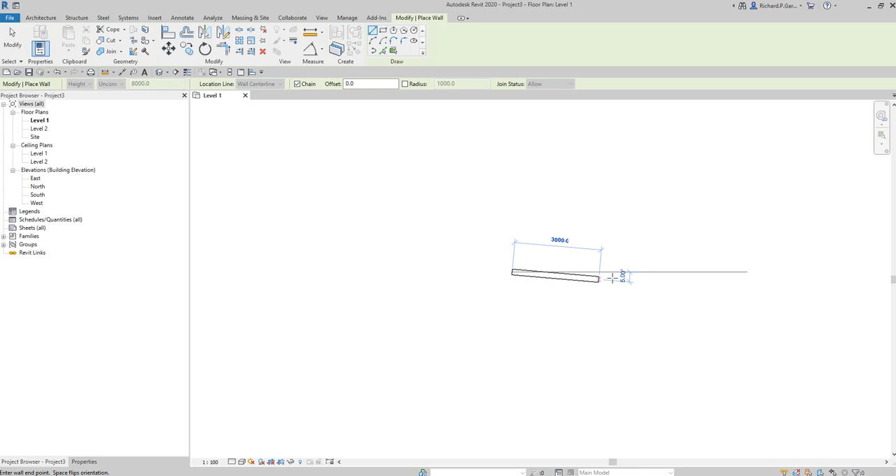So for you to be able to follow, I'm just going to create a new project using an architectural template, and then select OK. I'll just create a wall here, pick two points, and then place a window.

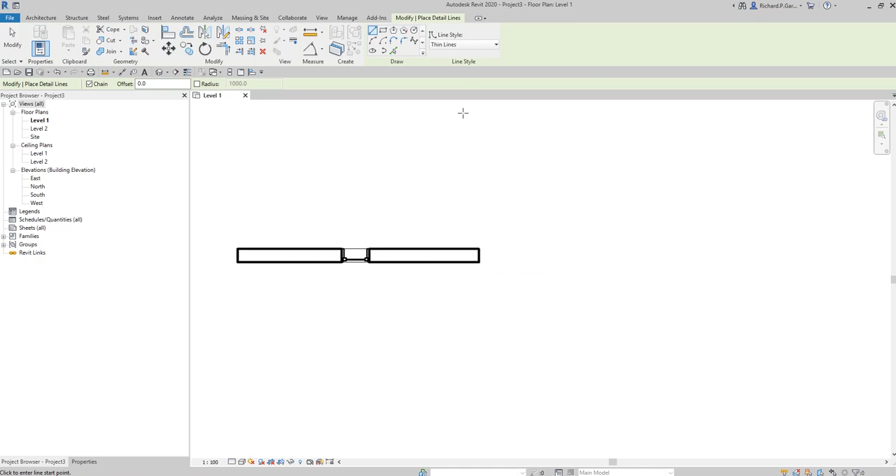So there's my window. Since I want to learn also how to generate a point from an intersecting element, I'm going to create a line here. Let's say, for example, I'm going to create two arcs.

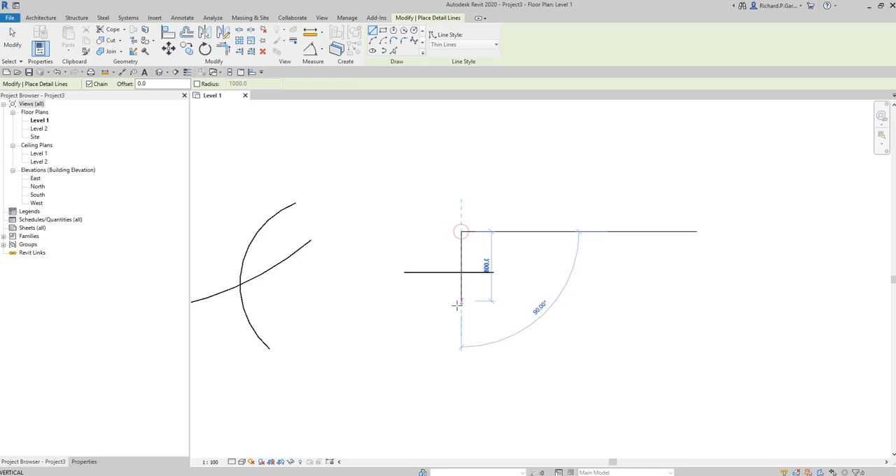I want to locate that point, get the location of that point in Dynamo. I'm also going to create another two lines here, just like that one, so I also want to get that point using Dynamo.

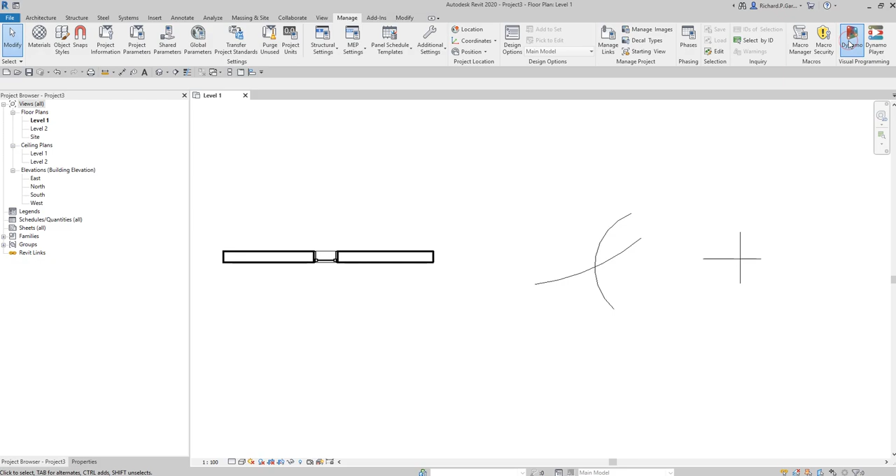After creating this sample model for our exercise, let's dive into Dynamo. Let's go to Manage, then Visual Programming, and click Dynamo. There you go, and then let's create a new workspace here, so I select new.

I'm not going to maximize the window because I want to see my Revit model here. So what I want to do first is generate the points here in Dynamo. I want to get the insertion point of this family. Okay, so that is what I want to get.

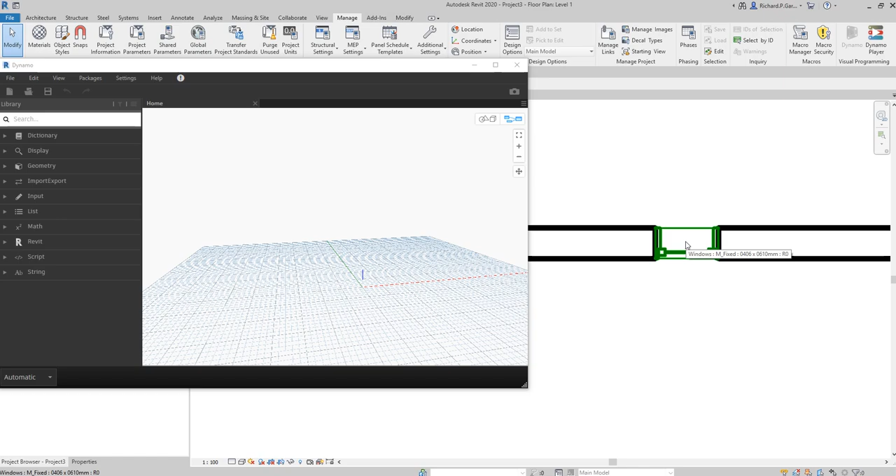To do that, I'm going to use this node that you already know. We are going to select Model. So we have two types of nodes here: Select Model Element, and the other one, Elements, if you want to select multiple elements. The other one is if you only want to select a single model element. So I'm going to go ahead and select this one.

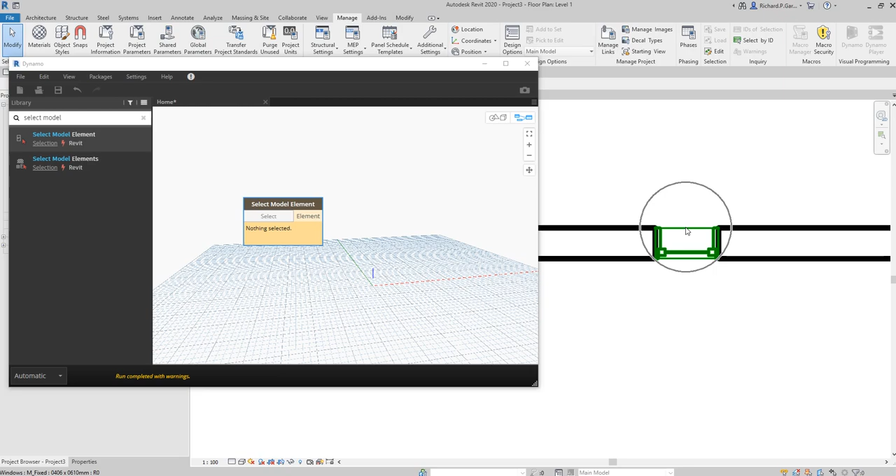As you can see, it says nothing selected. So I'm going to click Select, then hover my pointer to Revit to select the window. Once I click that, Revit will read that as element 361857. So this is the type of window that I just selected.

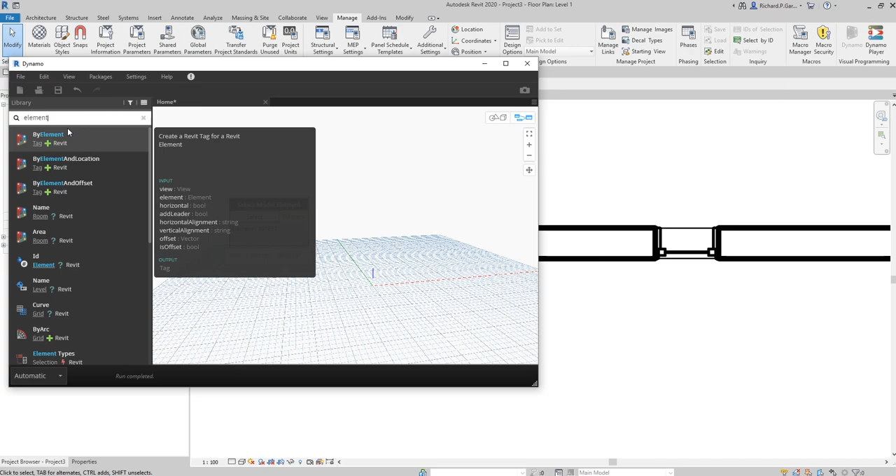Now, for me to get the location of that particular element, I'm going to search for get location. Element Get Location — there you go. This is the node that you will be using if you want to get the location of a particular family, just like this one.

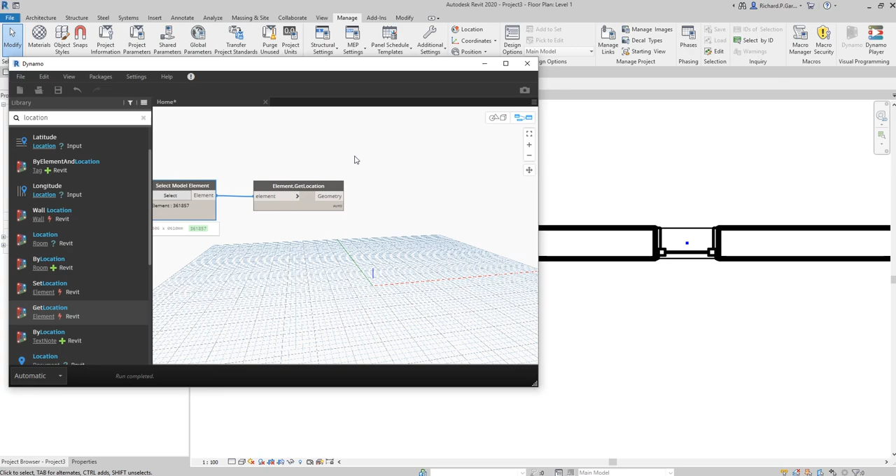After I select that family, I'm now going to connect that wire to Element, and place it. After it runs completed, there's now the point. So what is the location of that point? If I put here my Watch node, type Watch, click it, and connect that wire to the Watch node, as you can see, this is now the location of that point.

So that's the simplest way for you to get the location of your object. This is useful because you can use these values if you want to modify the location of that family, or use that as a starting point for some model that you're going to create later on. So basically, that's how you get the location.

So this is the new node that we have learned, Element Get Location. We know the rest already, but this is a new node in our session.

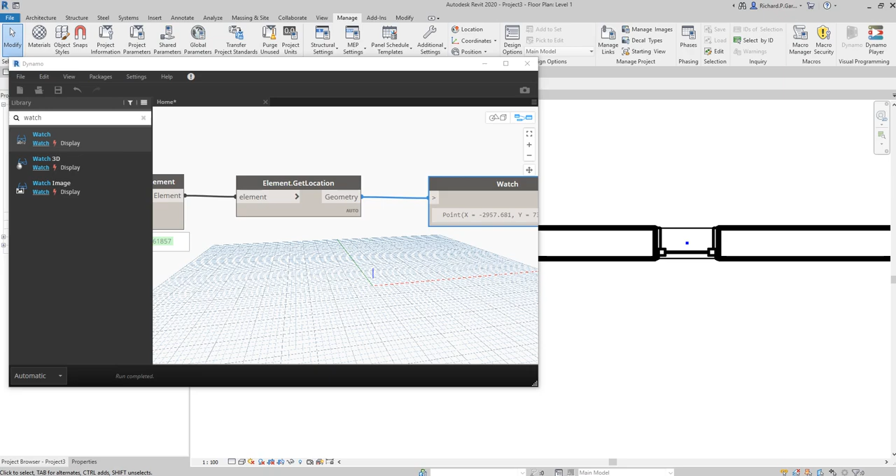Now, another way of generating our point: let's say, for example, you want to get the point at the intersection of these two curves. You want to generate the point, and for some reason check out what that point is. Just like this one.

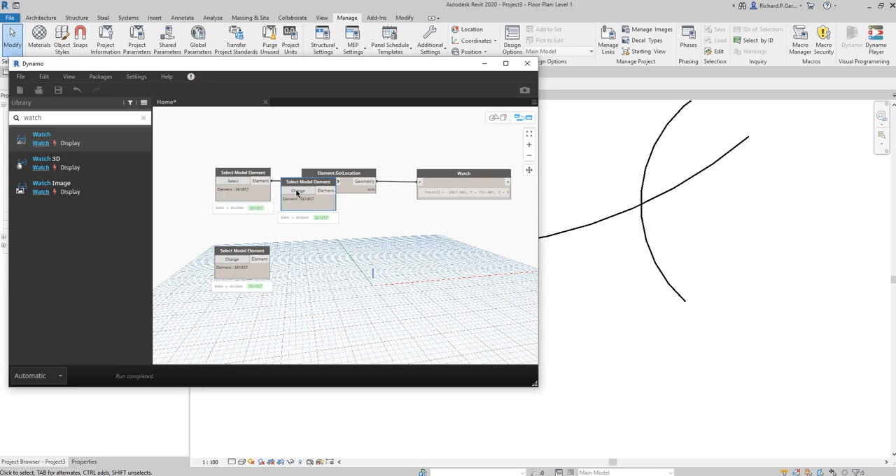All right, so we will be selecting another element, these two elements, using the select model element node again. I'm going to copy that with Control C and Control V. This is the first one, and then Control C, Control V again. There you go, I've got two here. As you can see, it says change here, because we already have selected this element, so we need to change our selection.

All right, I'm just going to go to Revit. Okay, this is our first element. I'm going to select change, and then let's select this one. Just click that, there you go, so there's the element ID. It says here detail curve. Now for the other one, I'm going to select change and then click this one. And again, it changed now to detail curve.

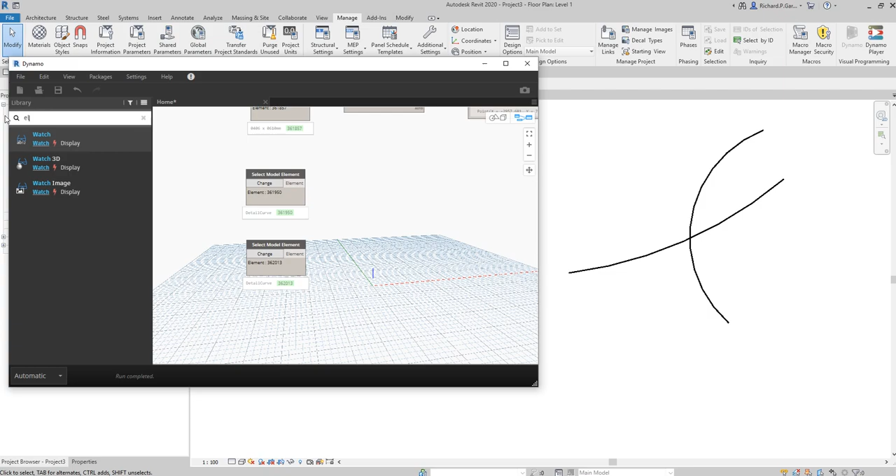Okay, now the next thing we are going to do is get our element geometry. So we are going to look for element.geometry, this one. It means get all of the geometry associated with this object. I'm just going to place it here, copy, Control C, Control V, and then connect it there, just like that.

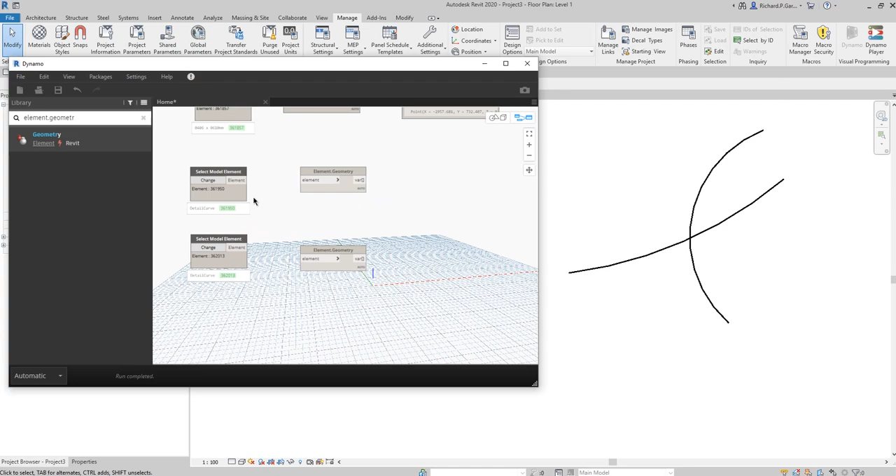Okay, so we know this already, this node, the element geometry. As you can see now, it's generated on our Dynamo environment. So if I change that to 3D, and then right click, zoom to fit, as you can see, I was able to generate the curve here using that particular node, which is element geometry.

Now, for me to be able to get the intersection, I'm going to use this new node. This node that I'm going to introduce is called geometry intersect. So this one, geometry intersect, I'll just click that one. There you go, as you can see, it has two inputs here: geometry and then the other geometry. So we now have one geometry and then we have the other geometry here.

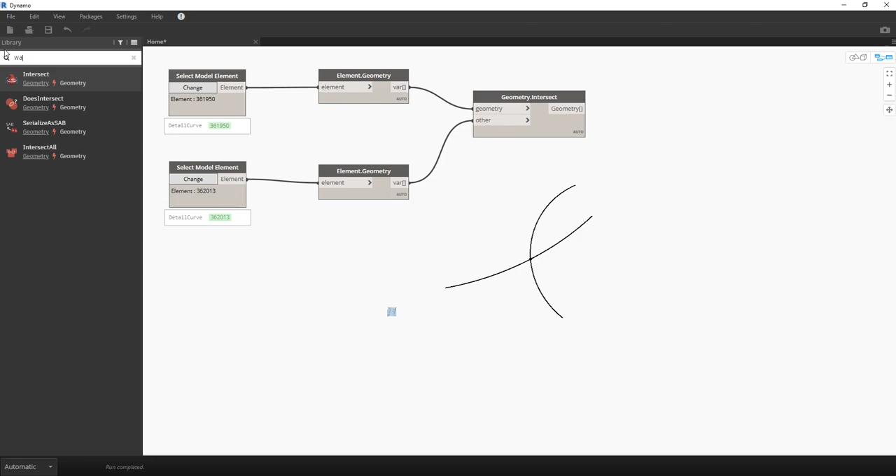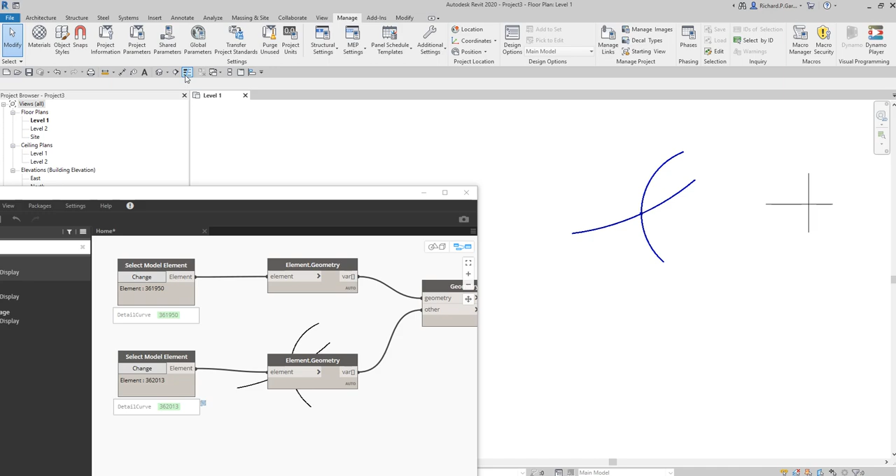There you go, and as you can see, after we connect, there's now the point that we are looking for. So if I go ahead and connect a watch node, I'll now be able to see that point. There you go, okay, so that's the point we are looking for. And if I go to my Revit, as you can see, there's a point here. There should be a point. Oh, it doesn't show. Oh, there you go, so there's the point. Okay, so probably I'll just turn on the thin line so you can see it more clearly.

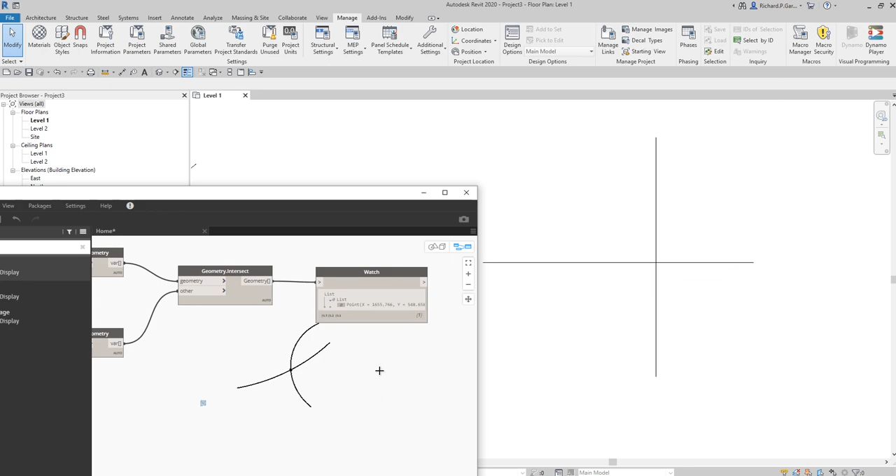So there's the point, all right, which is this one. Okay, so we are now able to get the location of that point and generate it. You can also do it here in this portion. All right, so let's say I'm going to copy, probably just copy the whole thing, Control C and then Control V.

There you go, but for this one, I need to change the element. So I'm going to click this one, change. I'm going to click this line and then click this one and then click this one. There you go, so I was able now to place and generate the point here. And same with here, okay, so I was able to generate it here.

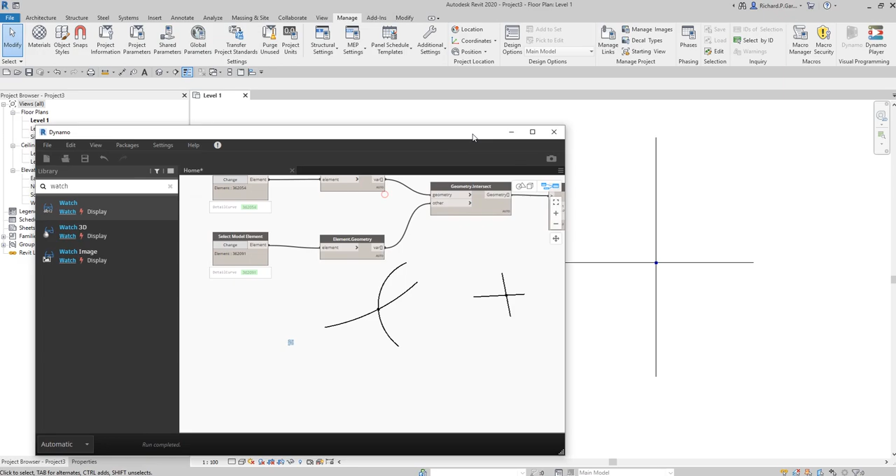So as you can see, if I go back here, there you go, we are able to locate the point location. Okay, so you can use this. Again, you can use these values for some reason if you want to use this as a start point for your model or end point of your model. Okay, so basically that's how you move it.

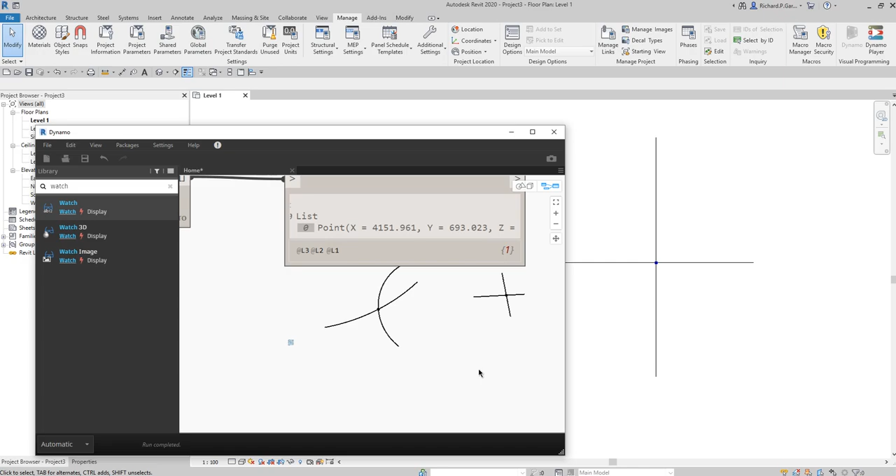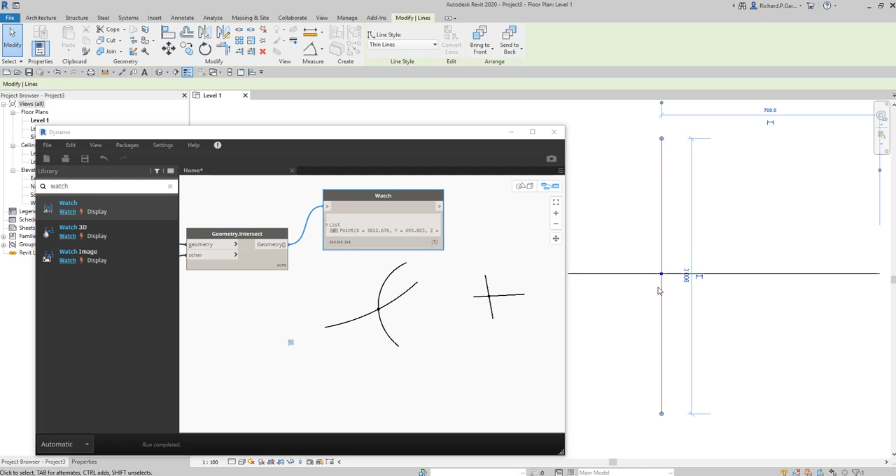Now, I want you to take a look at this one. So if I'm going to move this one, I'm going to click and then drag. So I'm going to drag this one. Notice that the value here will change, right? You see, the value of x is changing, because it refers to the intersection, to the point. You see? Now, if I'm going to move this up, it will not change, right? If I'm just going to move it up and down, because the point is not changing. The location of the point is not changing.

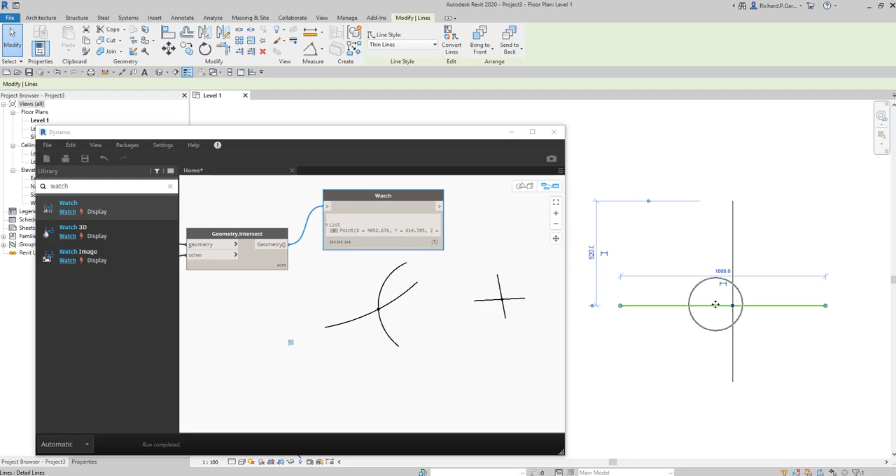But if I'm going to move it, you will notice the value here will change. Same with the horizontal, so if I click this and move it left and right, it will not change. The y-axis or the y value will not change. But if I move it up and down, you will notice your y here also changes, right? There you go, and same here with this one. So definitely this one, if I move one of the curves here, both x and y will change. Okay, so if I click this one, you see, both change, right?

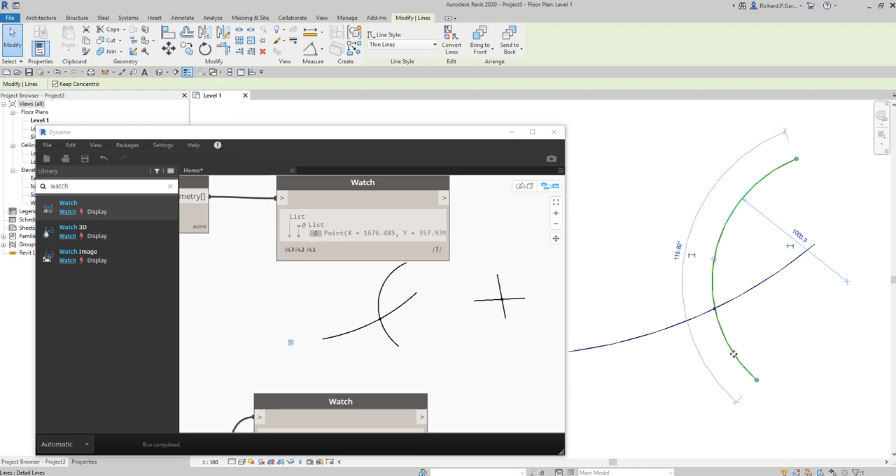Okay, you notice that? So both is changing. Okay, there you go. So that's our new node here. So the new node is Geometry.Intersect. Okay, now the next one, let's try to divide.

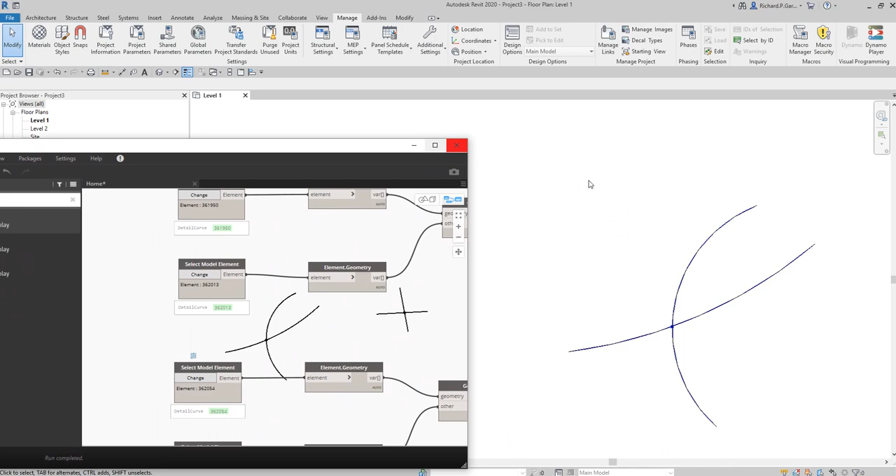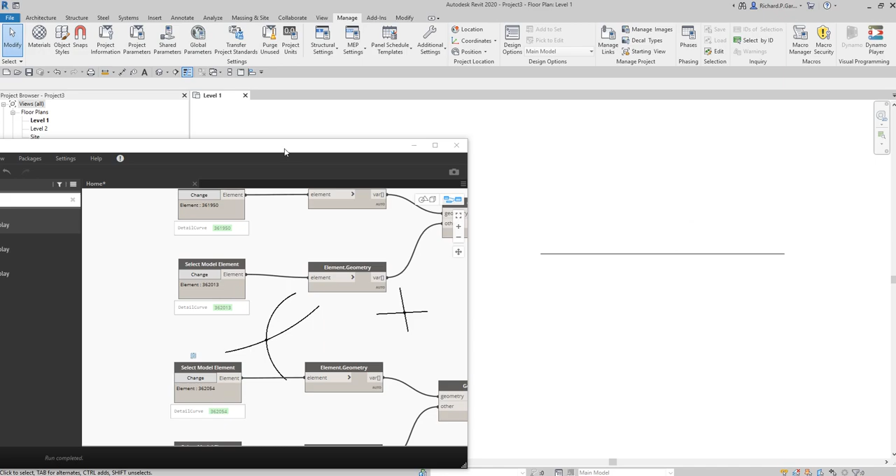Okay, so for example, going back to my Revit here, I'm going to create another line here. So this is my line. So I got one line here, one unit of line. Okay, so going back to my Dynamo, I'm going to use again Select Model Element. So I'm going to copy and then Control V.

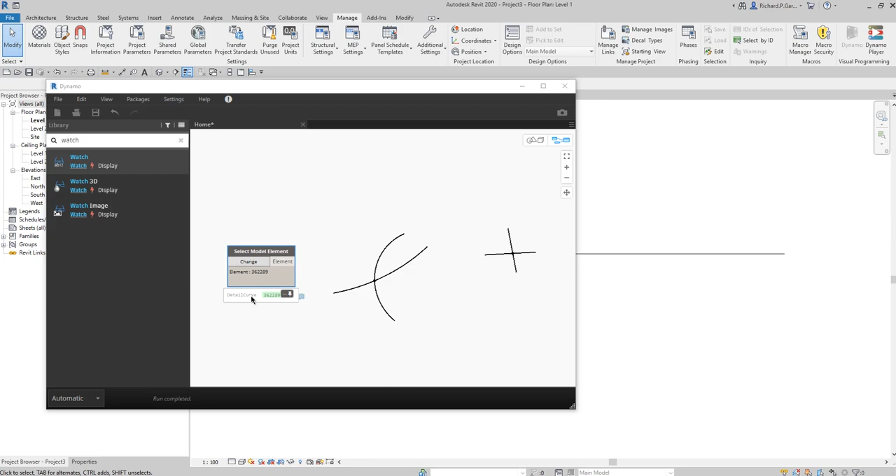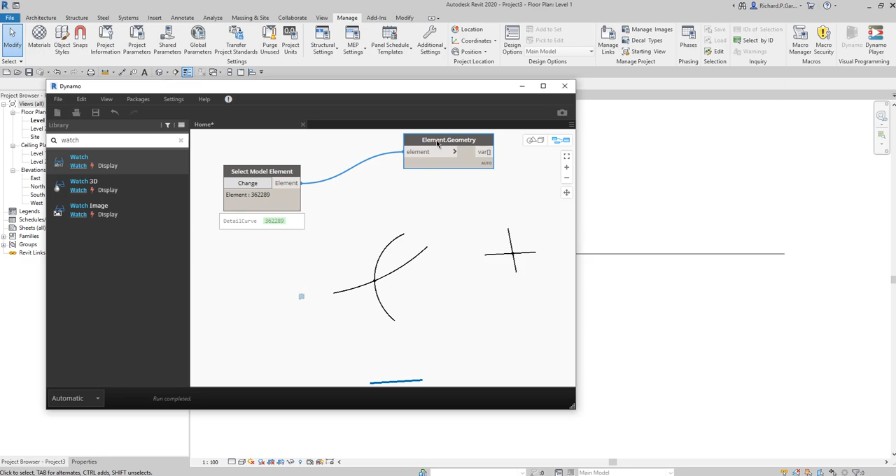So I'm going to put it here. So I'm going to change it. So I click this and then I'm going to click this new element that I just created. So that's a detail curve. And now I want to generate the line here. So I'm going to use again the Element.Geometry. So I'll just copy, paste. Okay, and then I'm going to connect it here. There you go. All right. So there's the line that I just created.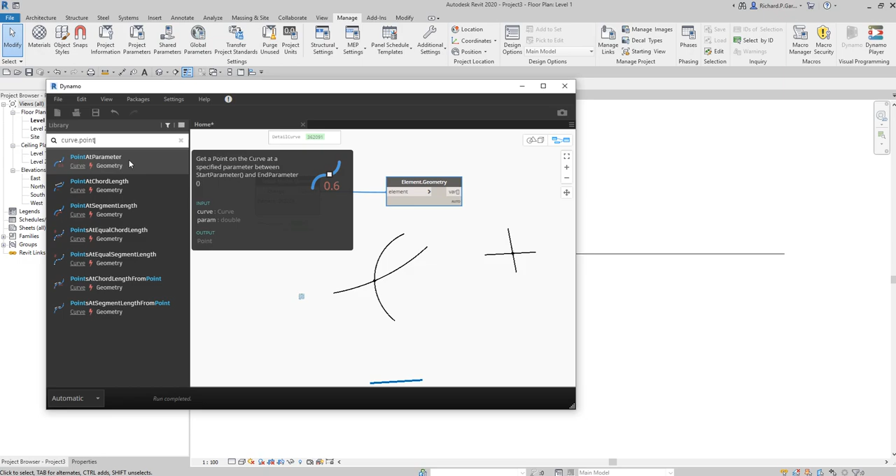Now, there is this new node that I'm going to introduce. So this node is Curve.PointAtParameter. So we are going to use this one. So get a point on the curve at a specified parameter between start parameter and end parameter. So what is this? Okay. So as you can see, the output there is point. And then we have two inputs, curve and parameter.

Okay, so I'm going to select this. All right, so we have two inputs here. We already have the curve that we want, so I'm going to connect that. Now we need this one, the parameter. Okay, so for the parameter, we need to specify here the range and then the step. Okay, so to do that, I'm going to introduce now the code block. Code block is when you double click at the blank space. When you double click, you will notice a code block will now appear here. So you can put here your code.

Okay, so for example, in my case, what I want is I want to have a range from 0..1 with an increment of 0.1. So that's what it means. So I'm going to click outside. Okay, so the way you read this one, it means the range is going to be 0 to 1, so it's between 0 to 1 unit, and then the increment is 0.1 or 10%. So as you can see, there's a list here that's already created. We have 0 to 1, and then there's the increment of 0.1.

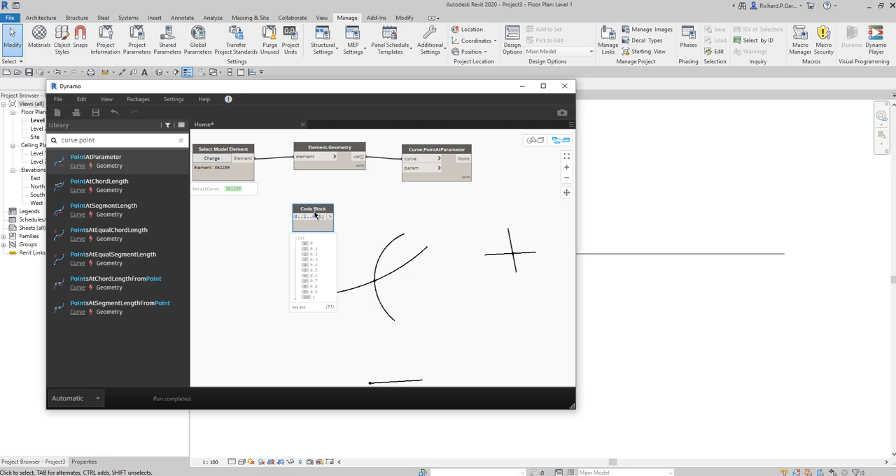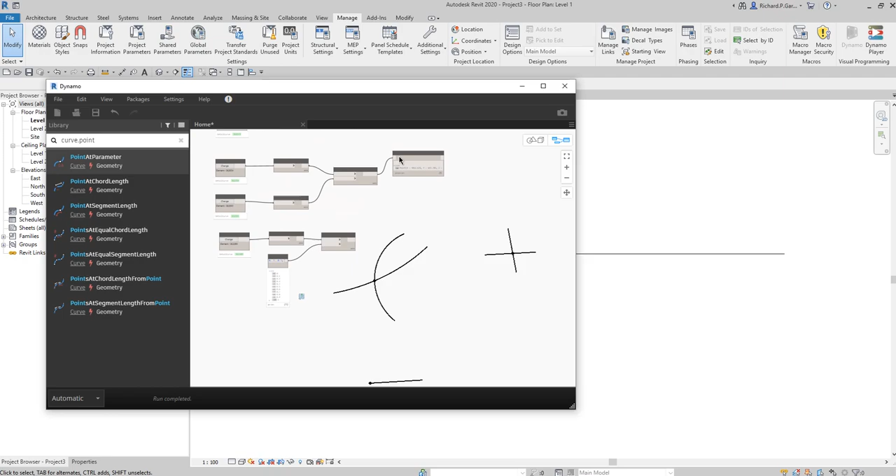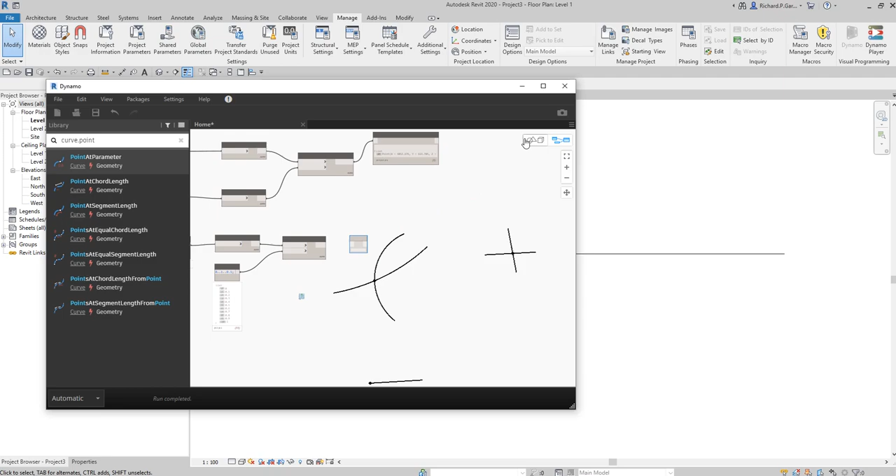Okay, so this is what I want to use to divide my 1 unit of line here. So I'm going to connect that now to that parameter. So I'm going to place it. There you go. And then where's my watch node? So I'm just going to copy one of the watch nodes. So copy that one, disconnect. There you go. Okay. So let us now connect this. So at the moment, I was able to create only 1 point here for this 1 unit of line.

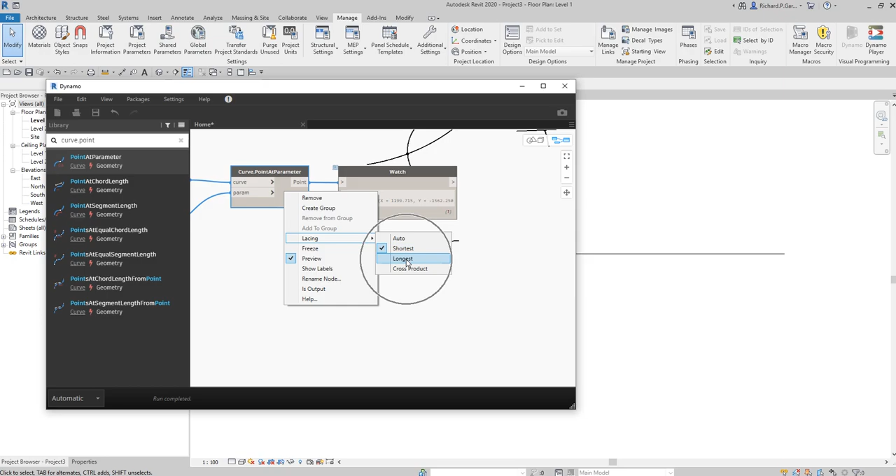So what I'm going to do is I'm going to click this one, the Curve.PointAtParameter. So I'm going to right click that because there's a problem with the lacing. For the lacing, it's set to auto, which is actually the shortest. So I'm going to go to the lacing. This time I'm going to select here longest. So just click that one. And there you have it. So I was now able to generate 11 points. And then there's now the points on my line. Same here on my Dynamo environment. Okay. There you have it.

So you just learned how to create points or generate points from Revit using your Dynamo. So this is a very powerful concept in Dynamo because points allow us to place a family at a specific location, or you can also use these points as a start or end point or midpoint of a certain line or curve that allows you to make a new geometry.

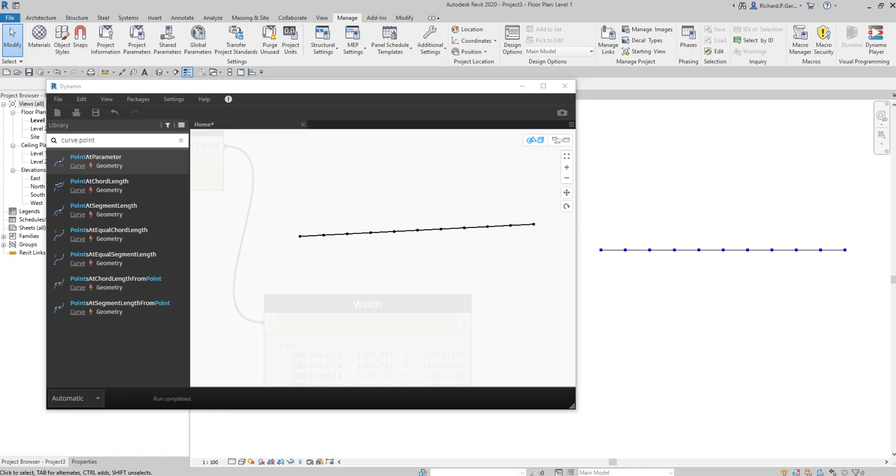All right. So hopefully you learned something from this video. So the new nodes that we have learned here are Geometry.Intersect, and Curve.PointAtParameter, and then the basics of code block.